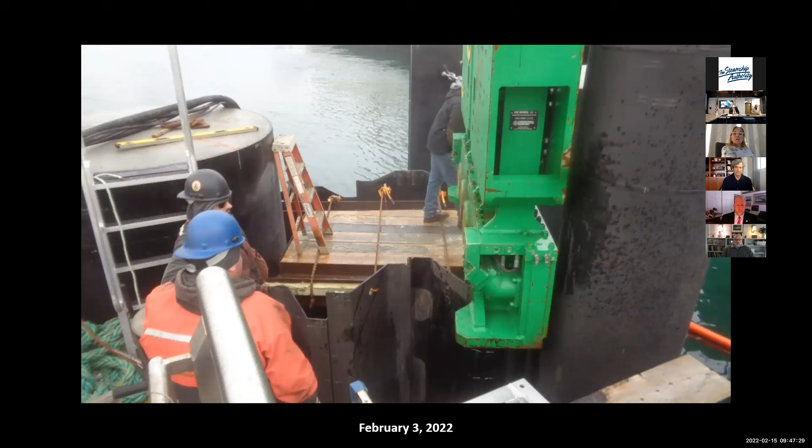This is a vibratory hammer driving the sheet piles. There were 4 double pairs. It took about 2 days to do that work.

This is a view of the South Head Dolphin with the utilities on it. The blue line is the fuel oil line, a double wall line going out to the hose reel. The sewers, sewer pump out, shore power and potable water.

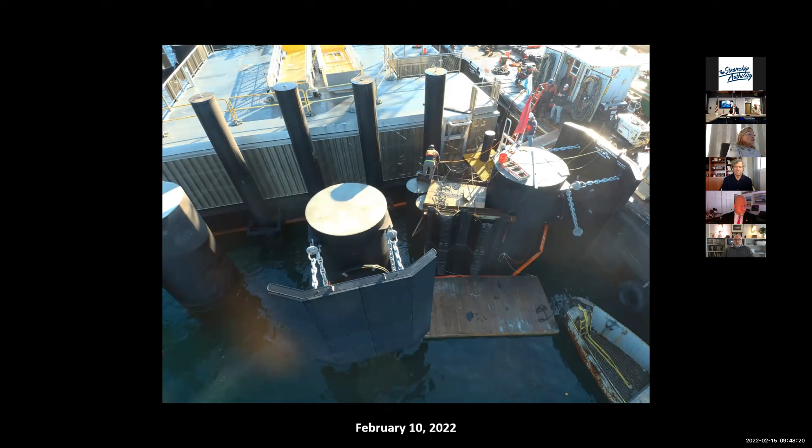This is a view with the sheets completed and the divers doing their work inside. There's a lot of welding and tiebacks and walers that need to be connected underwater.

This is a view of the south passenger floating pier, which is going to be useful for handicap access loading on the ferries. You can see the two gangways on the float.

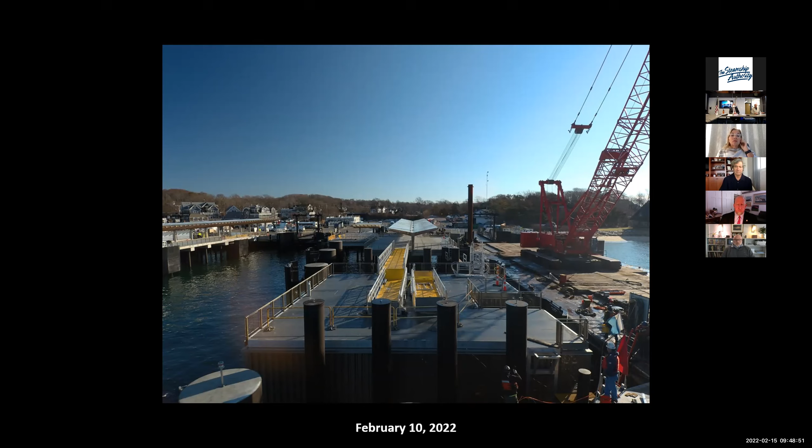So this is an aerial view of the waterfront. We're just about done, expecting to be done either middle March or towards the end of March. Waterfront is pretty much complete, except for monopile 24. So this is what the waterfront's going to look like in the future.

Okay, to date: the original contract was about 43 million. Change orders to date are about 16 million, which is 37% of the original contract. Total contract is 59 million, and the waterside cost estimate in 2017 was just about 54 million. We're over our original estimate by 5.5 million. With that, I'll take any questions.

Any questions? John, you got to change your screen.

I know that we're doing the coffer dam work on a time and materials basis. Have we had any overrun on the cost of that based upon the recent weather? I think we lost 2 days, Peter, for weather, but other than that, it's moving forward pretty well.

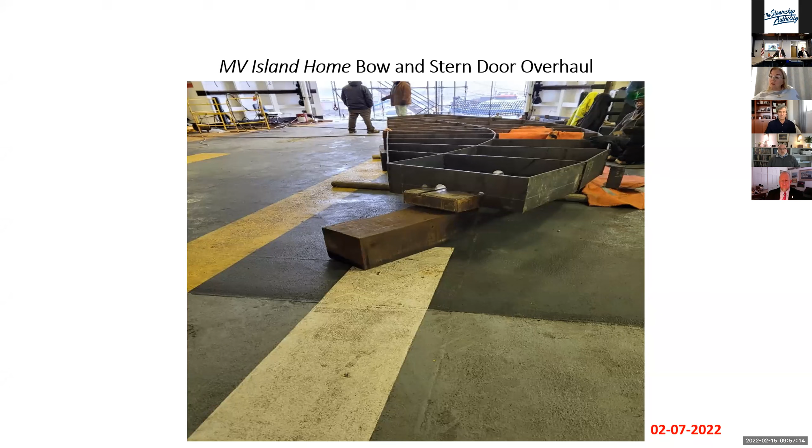This is a picture after water blasting the vessel. That's a picture of the rudder, where we've taken dimensions and clearances.

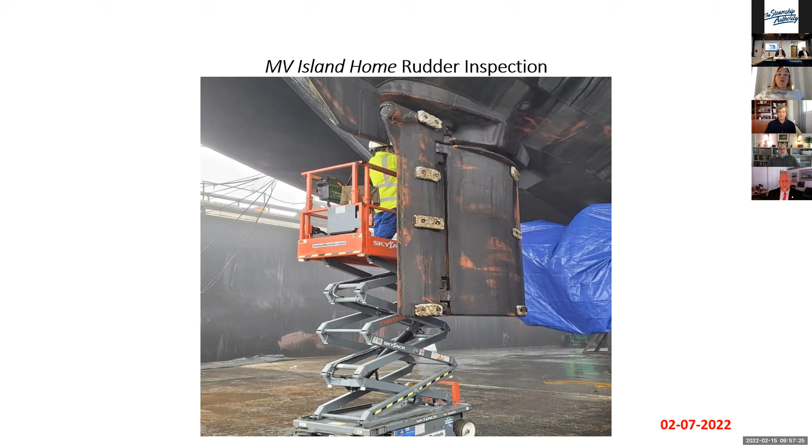So the dry dock highlights include bow and stern thruster overhauls, bow and stern door overhauls. We're modifying the marine evacuation system doors, blasting and coating of the hull, and overall rudder overhauls.

So the financial snapshot: our contract was 1.36 million. We have credits to date of 281,000 and change orders of 33,390. So right now we're at 1.1 million. The difference is we've not had to go to the extent of structural steel repair, and we're not having to remove the shafting and propellers as they're all in proper clearances. So I think we'll be coming in at a good level on the Island Home.

Any questions? No questions? Thank you, Mark. And how about the Iyanough?

Okay, the Iyanough - John, if you bring that up. Right now the Iyanough is going in, we're calling it a kind of mid-period in its life of coating. What we've done is taken all the coatings down with a process called glass bead blasting, and we're replacing all the coatings on the exterior hull and superstructure.

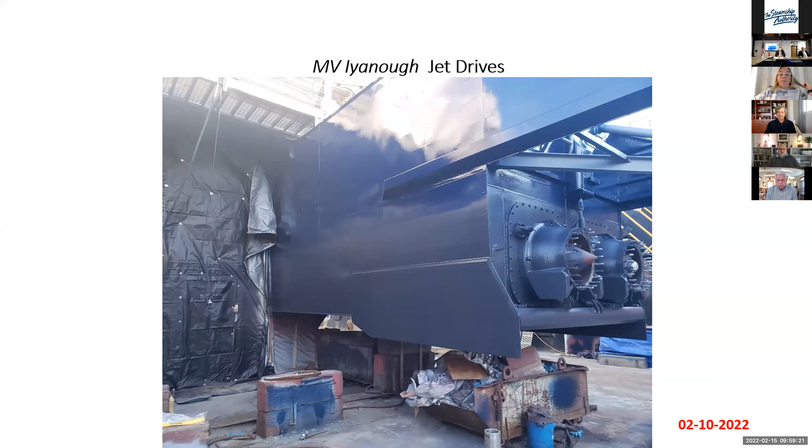This is a picture - we have all four jet drives, but you can only see two of the jet drives here, off for overhaul. This is a photograph of the steering nozzles - four of these have been blasted and coated.

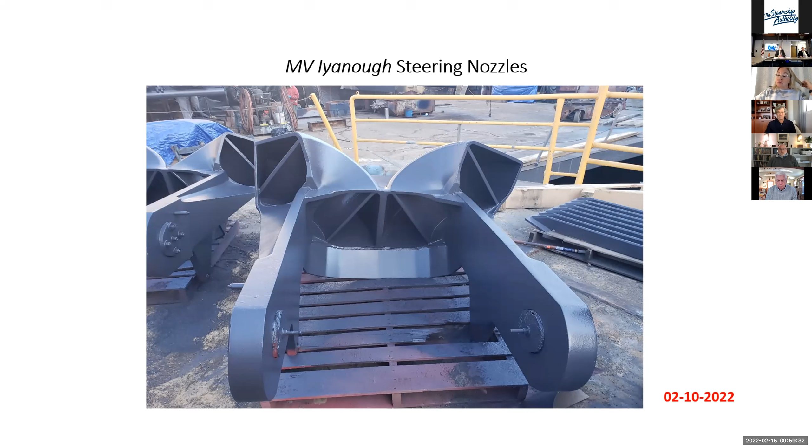What we've done is blasting in the interior of the pontoon and overheads, and this is what this photograph shows.

So the Iyanough dry dock highlights include extensive coating renewals, overhaul of the jet drives, and we've replaced all the carpets on the two levels. So the project's going well and is on time.

The dry dock cost is 566,000. We have 22,000 in credits, and the total change orders right now are 105,000. This includes getting into the jet drives and finding further damage that we had to correct. So the total contract credits and change orders is 649,000.

She'll be finishing up at the end of this month and going to Fairhaven, where we're going to install a new engine as part of the scheduled maintenance refit there.

Any questions? The engine that we have on the procurement schedule today? Yes, we do have that. This is the engine that we previously had purchased. Okay, all right.

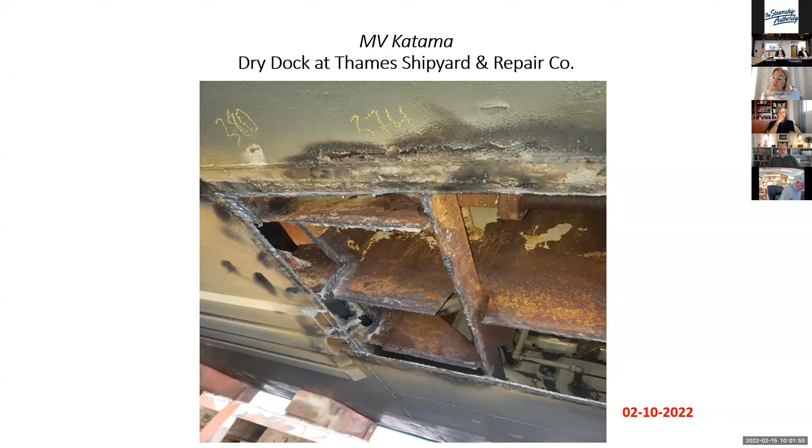What you see here is some ultrasonic gauging. We have now completed this. Sean, perhaps we go to the next slide. A little more, and one more, that's just a different view. This is kind of a side view of the channel cooler. So the hull, where the crack was not exterior to the sea, I'll call it the seaside. Next photo, please.

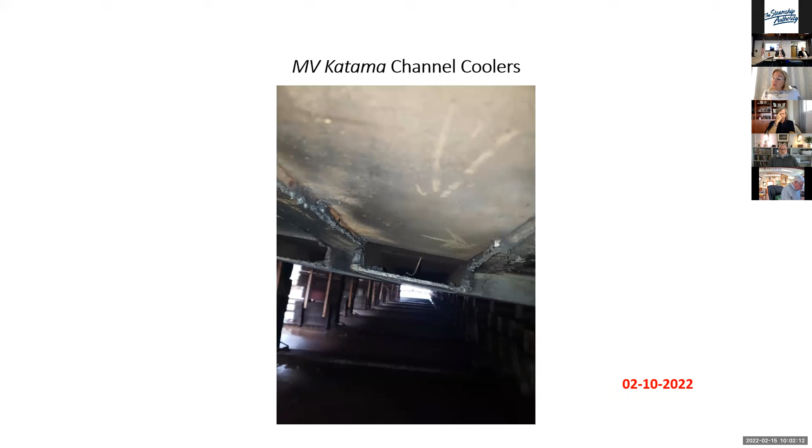So this is a photograph of the transverse watertight bulkhead. The Katama is 40 years old.

When I took over engineering and maintenance two years ago, I began what's called an enhanced ultrasonic gauging survey, where we take many thousands of gauging points to develop corrosion patterns. Right now we have a third-party review of the life enhancement or life extension with a third party, and that report will be forthcoming.

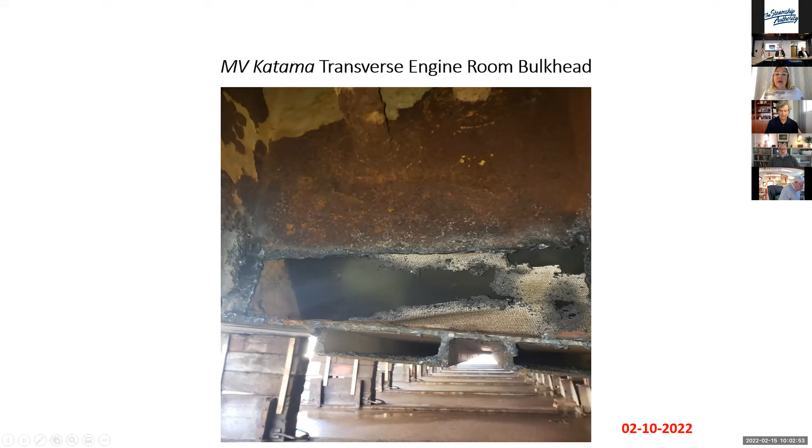Next. Is that report just for the Katama, or is it for all our vessels? It's for all of our vessels. We've gone through partially, we've done the enhanced ultrasonic gauging on all the vessels in the fleet, so we have a view going forward of kind of a pecking order of where we need to go from the Superintendent's maintenance point of view.

So the Katama will undock tomorrow. The vessel's repairs, we're just doing some coatings today and get back into service.

And lastly, we do have the Woods Hole just finishing up her repair period in Fairhaven. She's doing sea trials today, and we'll do Coast Guard sea trials on Thursday, and then she'll go back into service.

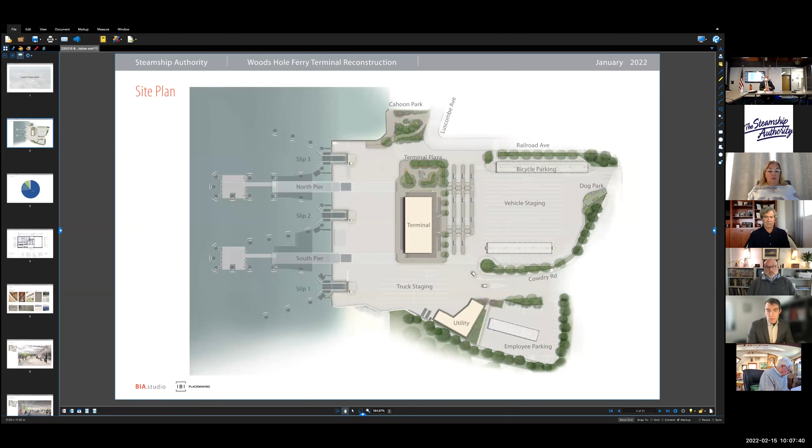We've also revised the Cowdrey Road entry to two staggered attendant booths. This configuration maintains a clear exit lane for trucks, preserves the turning clearances for buses entering towards the bus lanes, and also creates two entry lanes at Cowdrey Road.

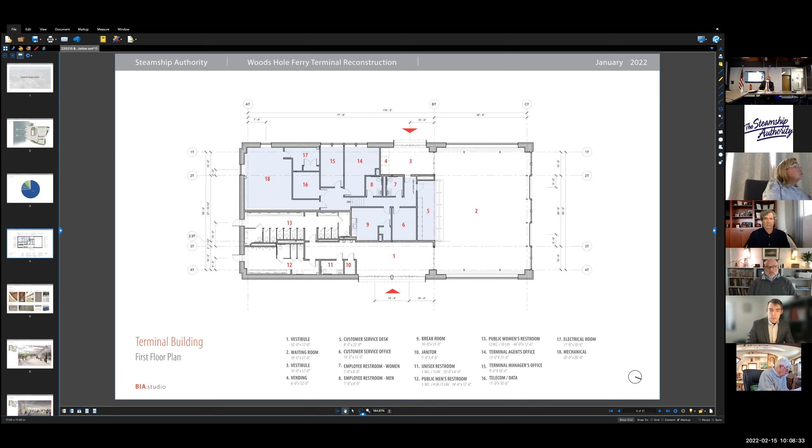All the windows in both buildings will be wood window systems, a highly durable hurricane-rated system that's also high performing from a thermal standpoint, and that will help us meet the net zero criteria for the project.

The utility building's second floor is using a cedar rain screen cladding that will gray and weather similar to a traditional Cape Cod shingle. Primary exterior metals will be marine grade stainless steel for the railings, fasteners, and anchors.

Both the terminal and utility building will be clad in a regional granite veneer. We've been working closely with some local stone suppliers and quarries to develop a custom granite blend that will approximate the historic Falmouth granite that's no longer available.

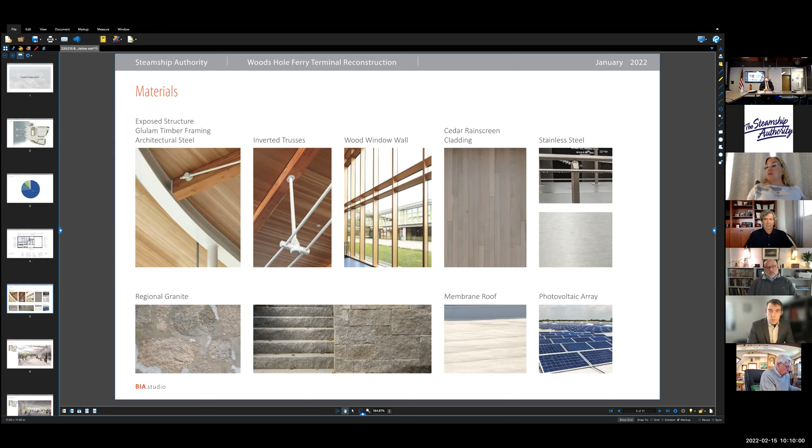Both buildings have flat roofs with tapered insulation and white membrane systems, and photovoltaic arrays are supported on curbs above the roof, providing our renewable on-site energy for the net zero project.

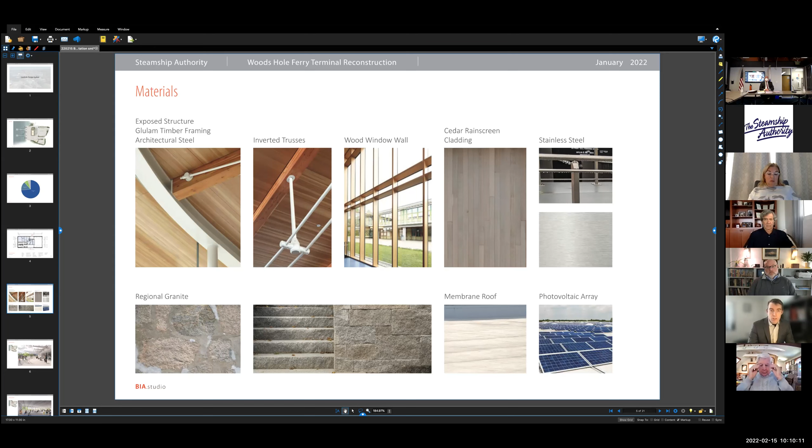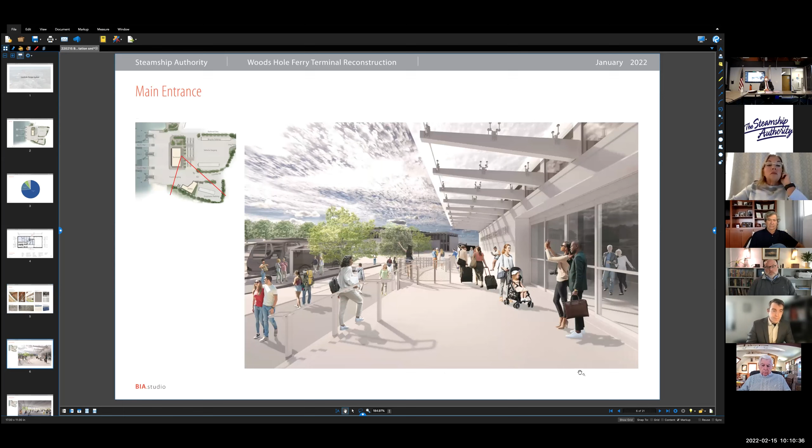After a lot of study of the east and west walls, we formerly had round windows, and we determined that elongated horizontal windows allowed a more panoramic view of the bus berths and the waterside operations. This view shows the highly transparent north wall that frames an attractive view of the village and a green foreground, a quality identified early on by village representatives as desired for the terminal building.

The roof support system, as touched on a moment ago, is comprised of a steel frame that supports the glulam and cable trusses that you can see here.

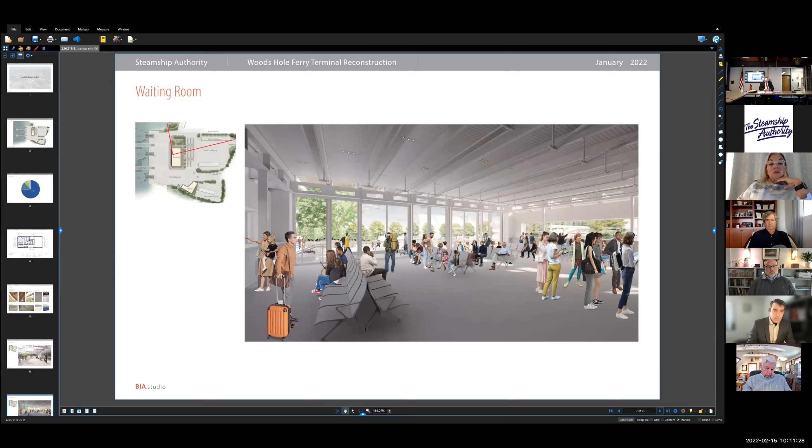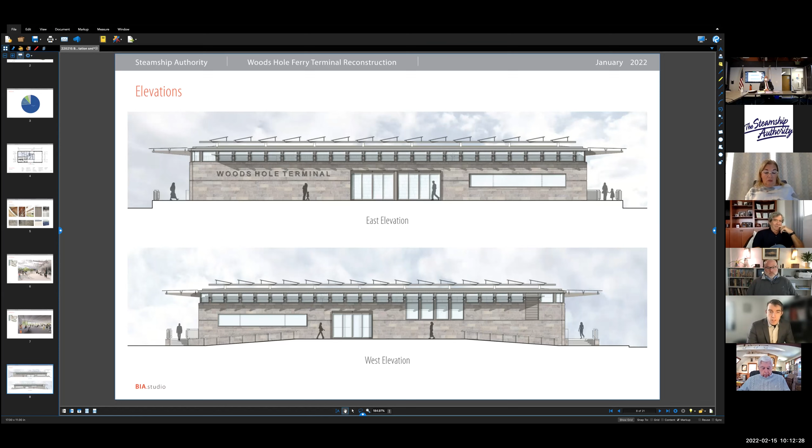You can also see in these views the elongated horizontal window that replaced the round windows. The sill of that window is set at elevation 17, eliminating the need for any deployable flood proofing on those sides of the building.

The north side of the building faces the outdoor plaza and is highly transparent. In warm weather, there are two sliding doors that can be opened, creating a connection to the plaza and the village beyond.

On the south side of the building, you can see the two doors leading out from the public restrooms on the right, and the mechanical room is positioned on the left.

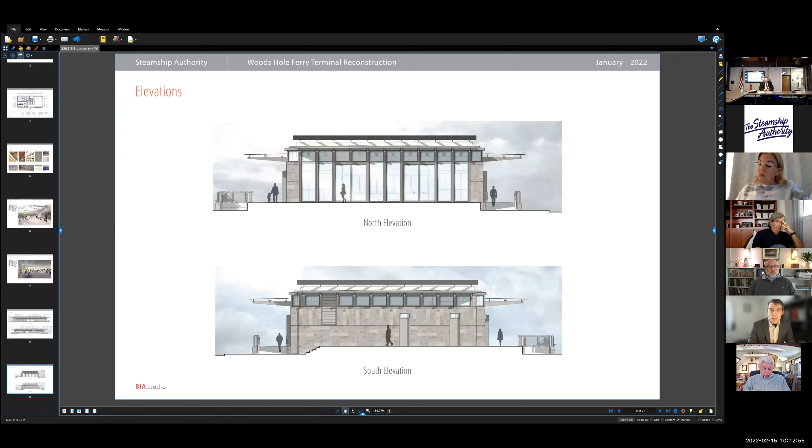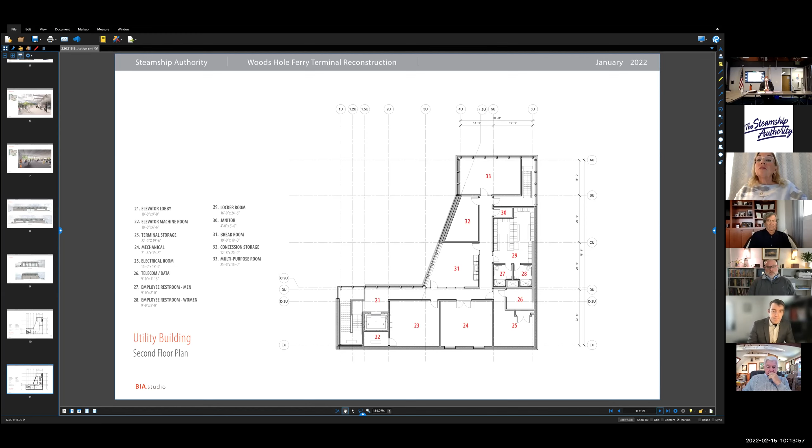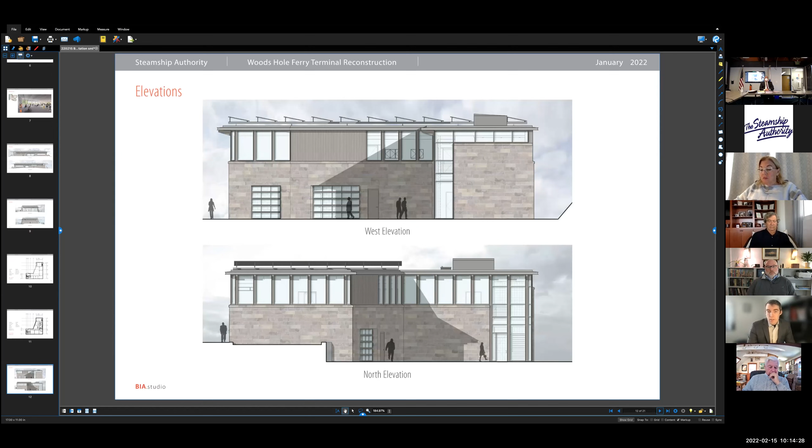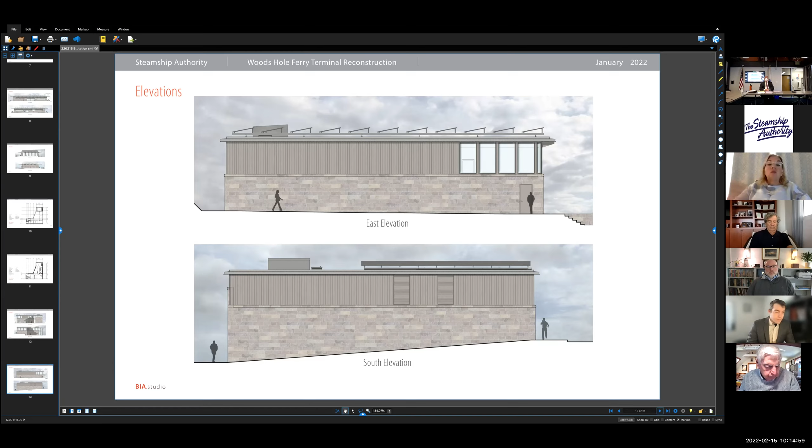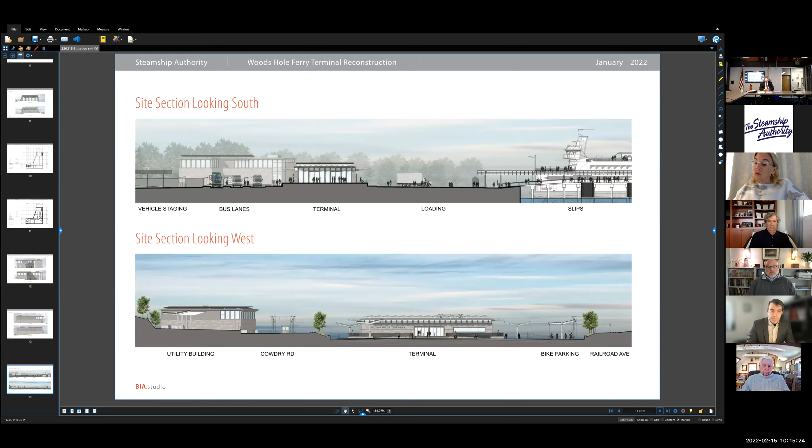Shifting over to the landscape design, the schematic layout has not changed, but we have added a significant amount of detail and also incorporated design elements based on several meetings, both in Woods Hole and on Zoom with Arden Edwards and a small group from the community.

The community design items include the design of the site lighting, which will conform to LEED dark sky guidelines, raising the Cahoon Park planter bed edges, which will be made from reclaimed granite material saved from the old park, a new granite base to hold the historic horse trough fountain located close to its original historic location, bronze plaques set into the paving materials, and interpretive panels, which will have content developed in collaboration with the community. A number of suggested topics have also already been identified by Arden's group.

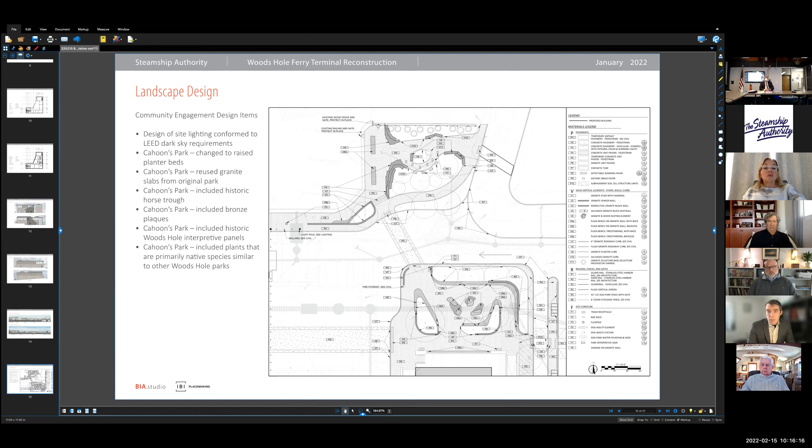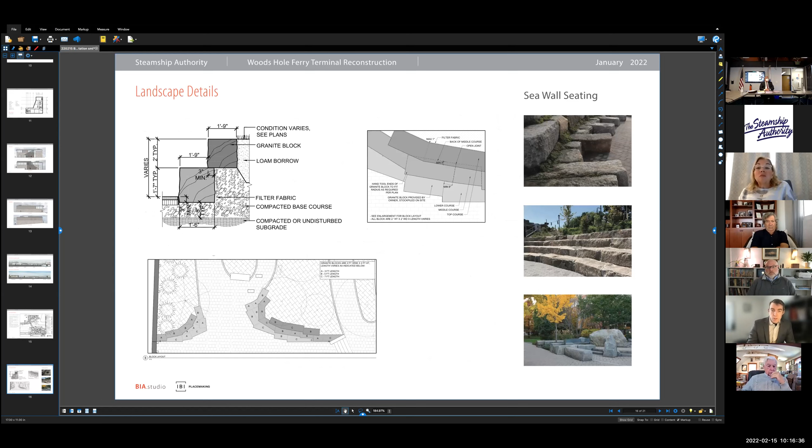Here you can see detailed drawings and images illustrating the stacked granite seat walls in Cahoon Park. These are meant to resemble a seawall facing the water's edge, and these stacked walls also provide tiered seating and containment for the built-up landscaping as we raise the grade through the length of the park.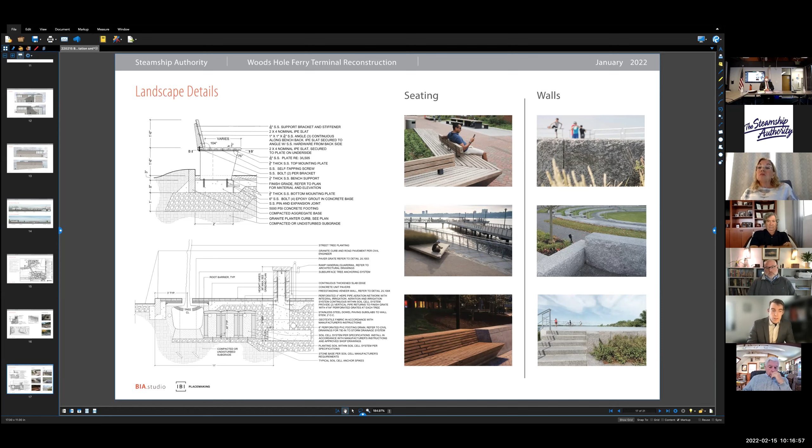The planting list has been developed based on community input and a tour that the landscape architect and myself took with Woods Hole Group. We looked at a number of Woods Hole parks that were both successful and unsuccessful in terms of their planting use. So as a general approach, all the plants are going to be selected from a list of non-invasive and highly adaptive plants.

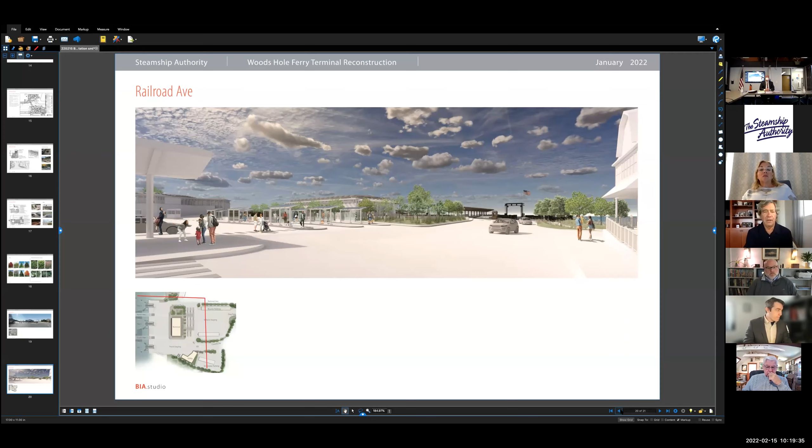Okay, so that's 2B. One of my concerns is hearing so many people being so distressed about scale here. I'd like to be able to visualize this. And if that's not possible, okay, because this is helpful.

It is, it'll just take me a second to get it opened up. Apologize.

So just as Liam's doing that, the perspective is slightly different. That one was taken right at the corner of the intersection. Right, because I think the other one is a little farther up where the crosswalk crosses over where the bike path ends now and where we continue and where it will be ending as well.

I'm just trying to visualize this since I've heard so much about it and I've seen things in schematics, but actually seeing the rendition is helpful.

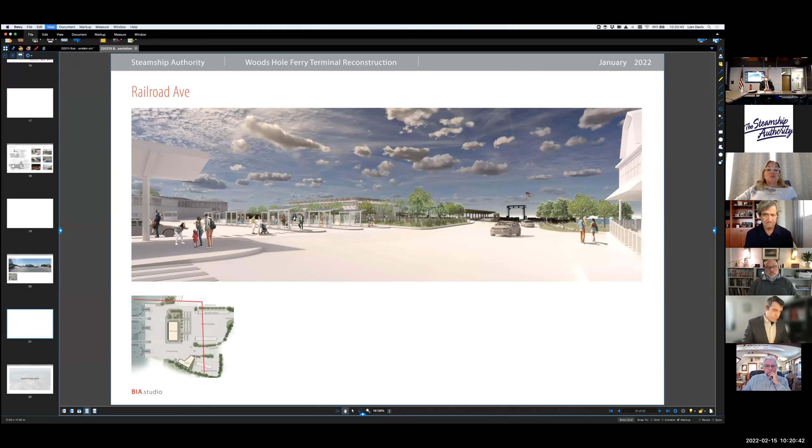Sorry, I had it in full screen mode, so it just takes a second to get it. Getting there, thank you.

Cool. This actually, so am I wrong? This actually from a ground level looks lower than the prior structure?

So these aren't 100% in the same position. We did shift it slightly just because the panoramic view photo we had wasn't exactly replicating the 3D model that we have. So the primary difference is that in the rendering, we're a little further up Railroad Avenue.

Yeah, and so you can see Quicks Hole Tavern versus seeing the Nishan Trust. But they're both taken from eye level. Okay. Thank you. That was helpful. I appreciate it. Sorry, Madam Chair, but thank you.

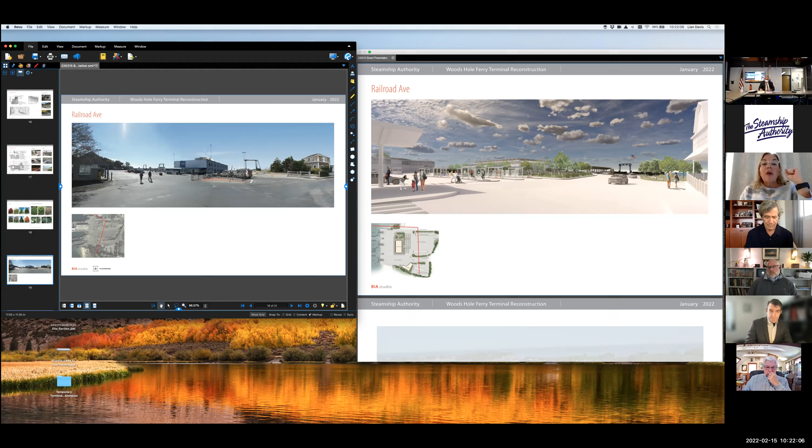Oh, no, thank you. Are there any other questions? Yes? Go ahead, Falmouth Rep.

To the ongoing landscape design, from the last kind of public input, where are we in trying to develop mitigation of traffic noise? I know one of the main concerns from the village was the loss of some of the embankments along Railroad Ave and its impact on noise mitigation from traffic.

Do you want to address that, Chris, or do you want me to? Go ahead. I'm not.

So there's, I'd say we've had competing points of view from the community on that embankment specifically. On the one hand, there's a desire from the bicycle group, as we understand it, to maximize parking and also maximize the width of the bike path as it passes through that park. And so we've been balancing that desire with the desire for planting, which the design team also shares.

So the way it's laid out currently, we have a landscape buffer there. We are planning to maintain some of the existing planting further to the east, close to the embankment at the bridge itself. But along the new retaining wall, the intent is to replant that area with a combination of low shrubs and deciduous trees. So that's where the design stands currently, and as I said, it's been a bit of a balance to meet both of those interests.